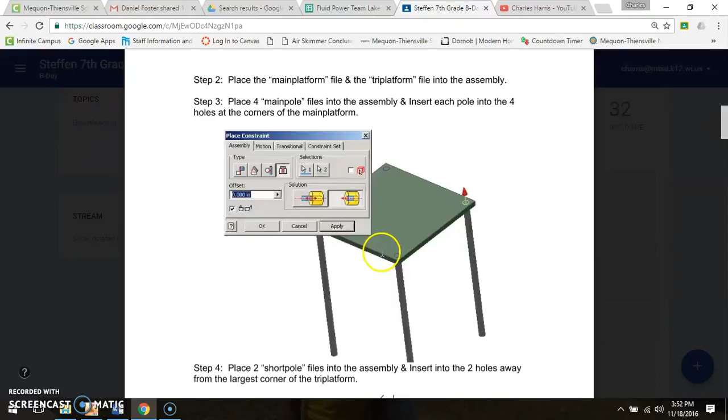Now that we have the monkey bar subassembly done, we're going to get started on the platform subassembly. To make the platform assembly, we need to bring in the main platform and 4 main poles.

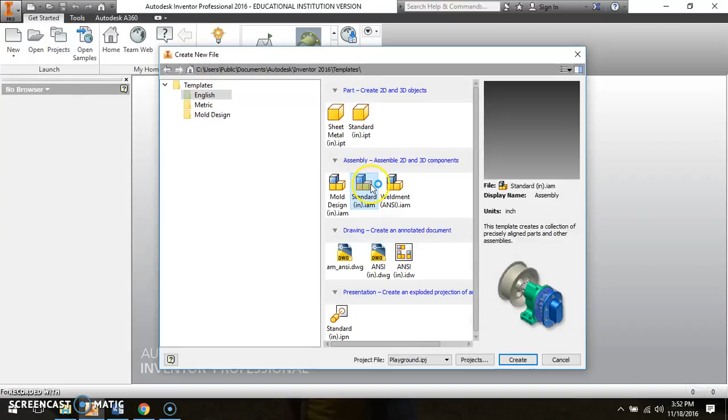So we go back to Inventor, make sure that we are in the right project path, and we are. Go to New, English, Standard.iam, and we're going to place our main platform.

The main platform should have been made off the top view according to the drawing. Right click OK, and we need to ground this and make this our pin piece, because this main platform is going to serve as our anchor piece for the remainder of our assemblies. So right click, grounded. That has now become our pin piece.

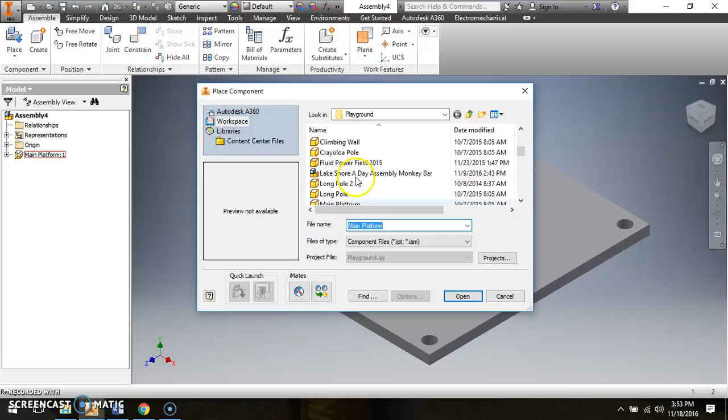Next, we're going to place 4 main poles into our assembly. So go to place, and you will need to find your main poles. So 1, 2, 3, 4, right click, OK.

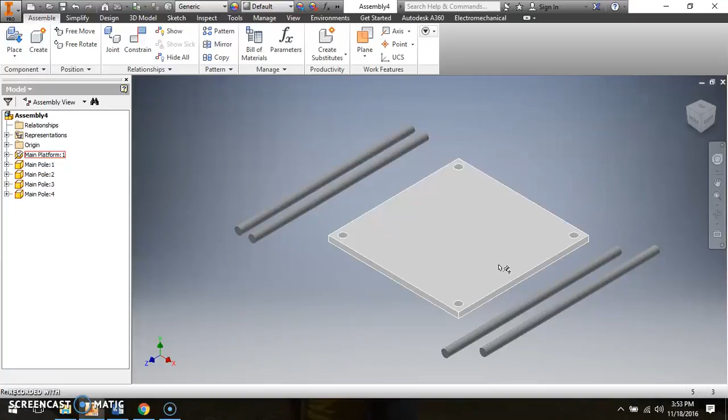To constrain them, I know the directions say to use insert constraint, but we're going to use a mate constraint to put these in and flush the tops of the main poles to the main platform. So constrain, I'm going to pick the center line of the main pole, zoom in, click the center line of the hole, left click, click apply.

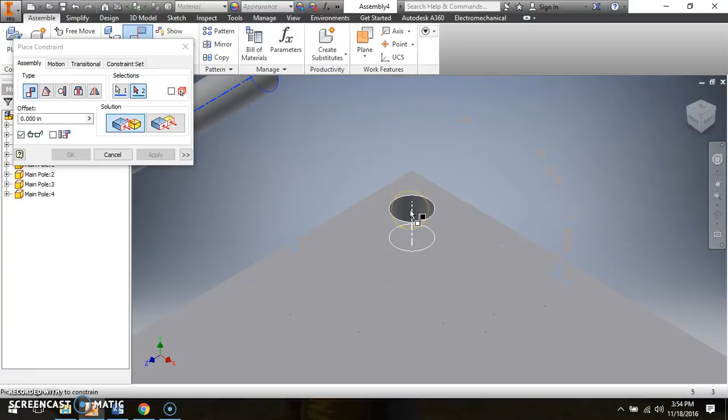I'm going to click the center line of the pole, zoom in, center line of the hole, click apply. Center line of the pole, center line of the hole, click apply. Center line of the pole, center line of the hole, click apply.

Now I've got one more constraint because I've got a couple of degrees of freedom left. The poles slide in and out of the hole. I obviously don't want to do that. What constraint am I going to use in order to put the poles and make them flush with the top? Correct, I'm going to use a flush constraint.

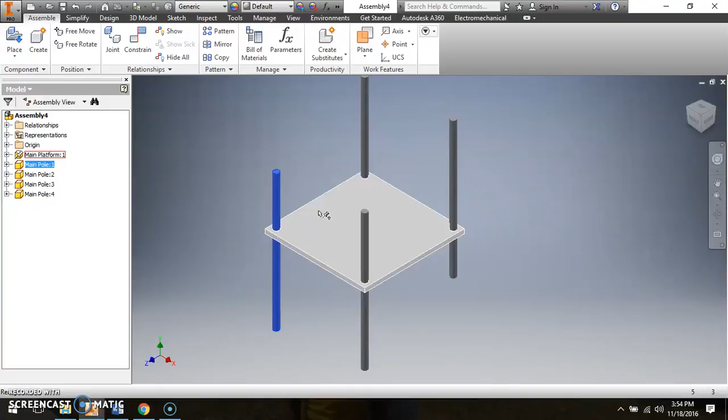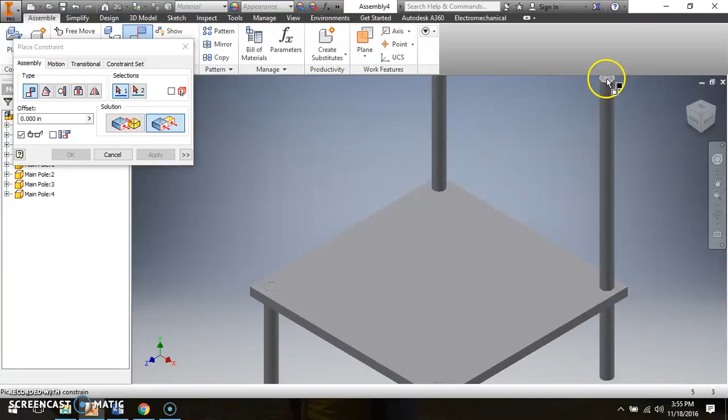So I'm going to go to constrain, I'm going to select the flush option. I'm going to select the top of the main pole with the top of the main platform. Click apply. Select the top of the main pole, top of the platform. Apply. Top of the main pole, top of the platform, apply.

Zoom out a little bit. Select the top of the pole, top of the main platform, select apply. All right, so now we have our main platform done.

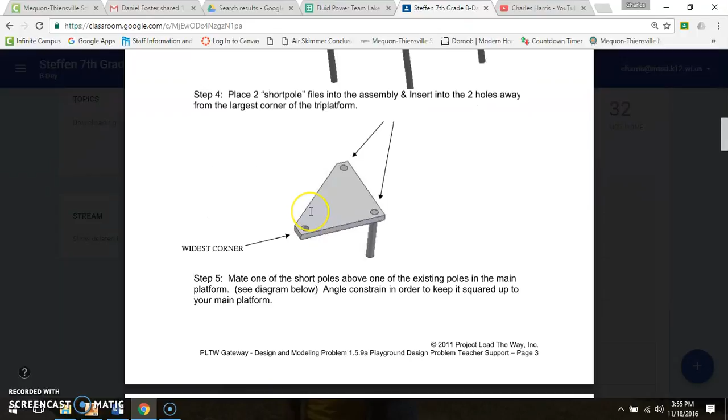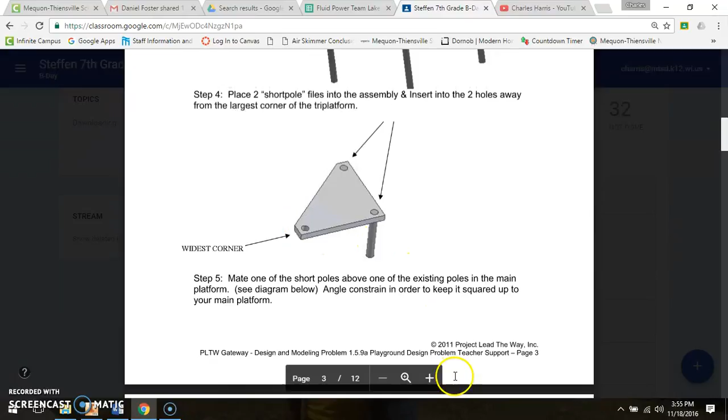Now, according to our directions, we're going to bring in the tri-platform. According to our directions, the widest corner needs to be the front of the tri-platform. Because remember, if we're looking at this and this is our view, this would be the top, this would be the front, this would be the right side.

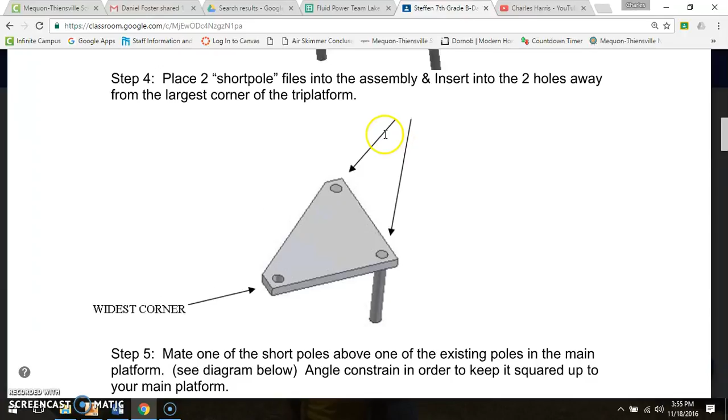And according to our directions, we need to put 2 short poles opposite the right side of our tri-platform. Now this is going to take a little bit of maneuvering on your part.

So the first thing to do is to bring in the tri-platform. So we're going to find the tri-platform. Left click, right click, OK.

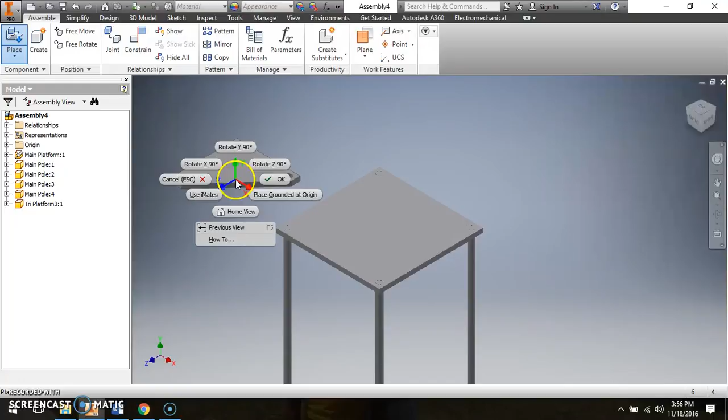Now I need to rotate this tri-platform in order to put this in the right orientation, because the diagonal is facing my left. So I'm going to go to free rotate. I'm going to click on the free rotate, and I'm going to rotate this around to get this in the right orientation so that the diagonal is facing my right.

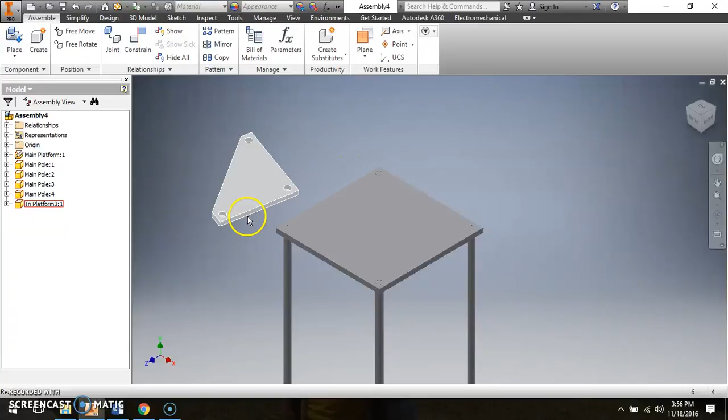I also want to make sure that the widest corner here is facing the front. So just to double check, I'm going to go to Inspect from the Quick Access toolbar, go to Distance. I'm going to pick the 2 corners here, and that is the widest corner. So that makes this corner up here in the upper left-hand corner the 6-inch corner. So this is in the right orientation.

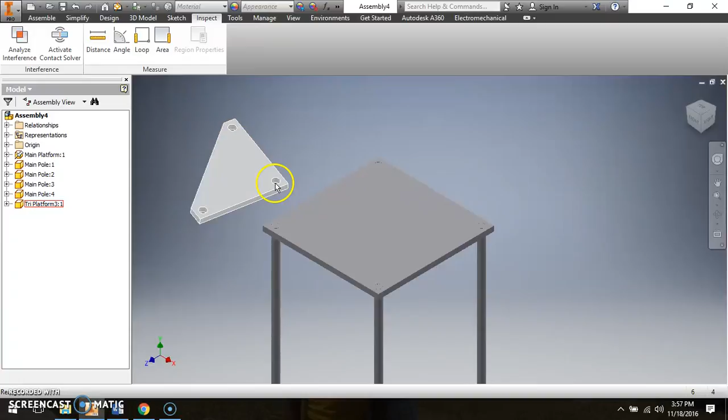I'm now going to place 2 short poles in this hole and in this hole. So I'm going to go to Assemble, I'm going to go to Place, and I'm going to place 2 short poles into the subassembly.

1, 2, right-click, OK. The process to constrain the poles is exactly the same. You're going to mate the central line of the poles and flush the tops with the tri-platform. Constrain.

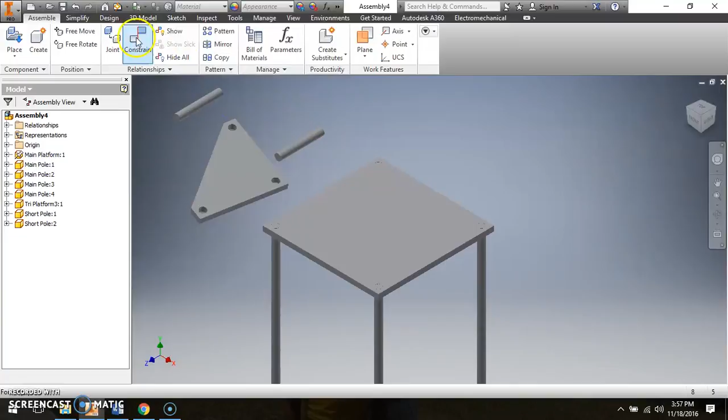I'm going to drag this out of the way. Select the center line, select the center line of the hole, select apply. Select the center line of the pole, the center line of the hole, click apply, and click flush. Flush the top of the pole with the top of the platform, click apply.

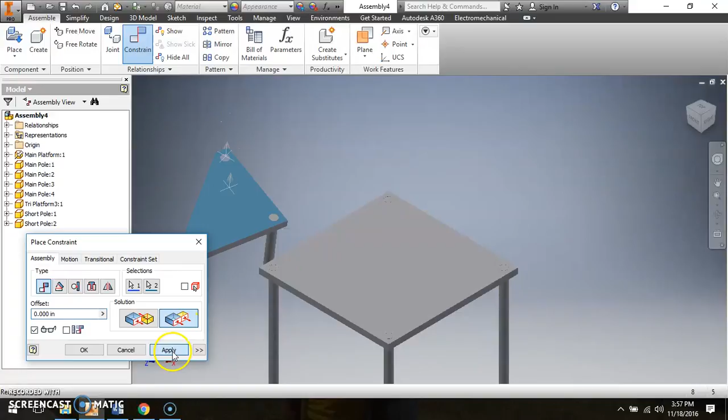All right, so this platform is now assembled. We won't be able to rotate it because as a subassembly, we're missing some relationships, since everything in Inventor is about relationships. And the reason we use constraints in the first place is to show the relationships between objects and how we want them to behave in the real world, how they interact. That's what the constraints show us.

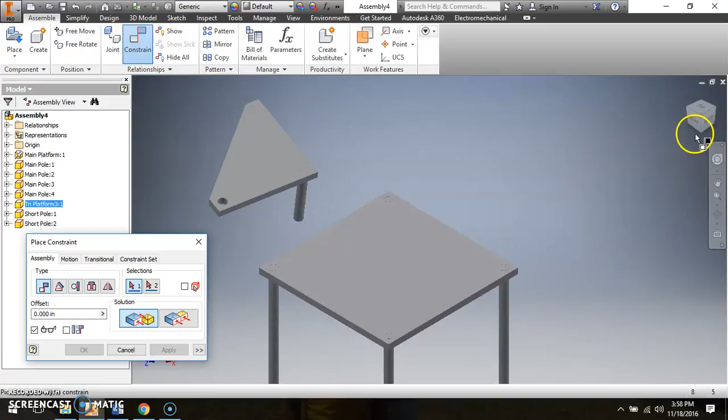So in order to constrain this, I need to pick this pole here. I'm going to go to constrain, and click the bottom of my home. Actually, I'm going to close this. I'm going to select the bottom of my home cube. So I'm looking at the whole assembly, and I want to pick this pole.

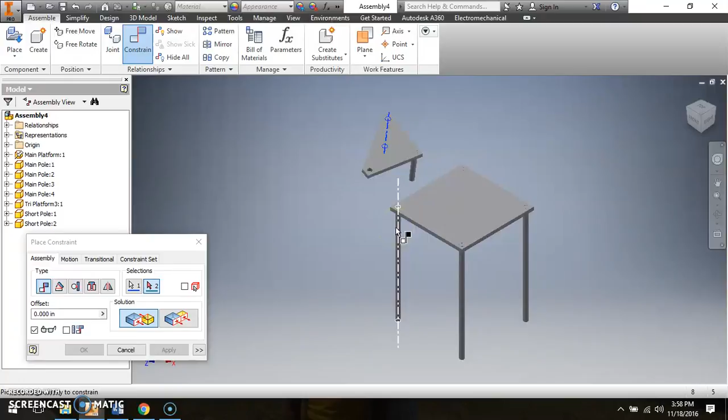I'm going to go to constrain. I want to align the center line of this pole. I'm going to go home, and I want to align that pole with the center line of this main pole here. I'm going to click apply. Close the constraint dialog box.

I've got 2 degrees of freedom left. Now this pole is aligned with the main pole. The short pole is aligned with the main pole.

What I need to do now is select the bottom of this pole and do what to the main platform? What constraint am I going to have to use in order to limit my degrees of freedom? Am I going to use a mate or a flush? Correct, I'm going to use a mate.

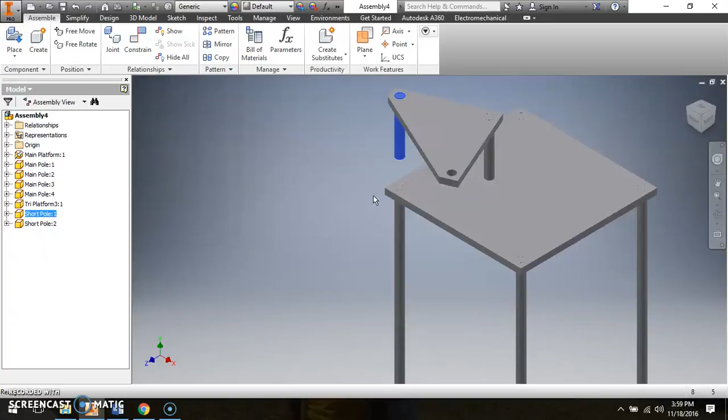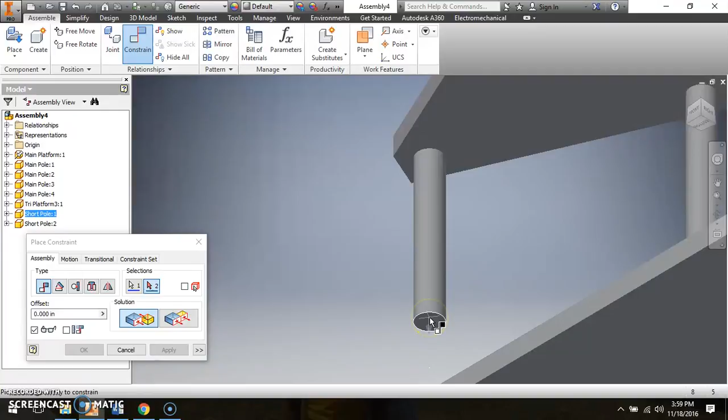So I'm going to go to constrain, go to mate, select the top of the main platform, select the bottom of that pole, and to get to the bottom of the pole, I'm going to select this corner of my view cube, select the bottom of the pole, select apply, close the dialog box, go home. Now I've got 1 more degree of freedom left.

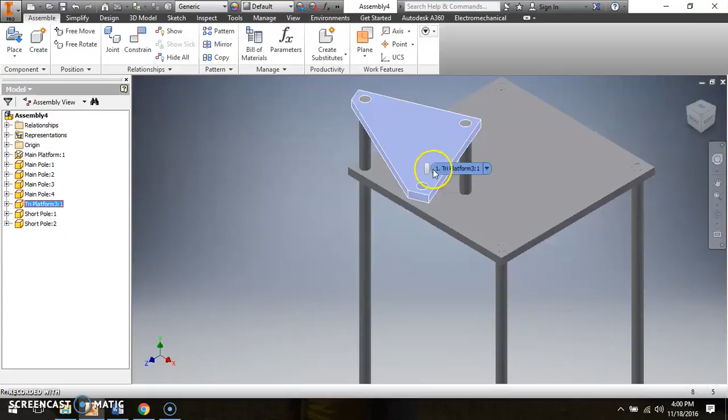Now I've created a hinge. Now I've got this rotation. How do I limit the rotation? This is going to be an unfamiliar constraint for those of you that don't remember this. Now I need to use an angle constraint. I can't use a flush constraint. I'm going to use an angle constraint to limit the motion or restrict the motion.

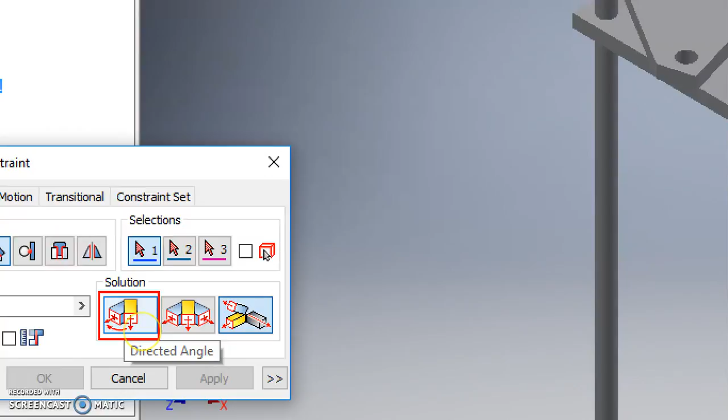So I'm going to go to constrain. I'm going to select the angle constraint, which is right here. Here's the angle constraint. And I'm going to select directed angle, which is right here. Directed angle. I'm going to click the front of the tri-platform. I'll zoom in. I'm going to select the front of the tri-platform, the front of the main platform.

Make sure angle is set at 0 degrees. Click apply. Close the dialog box. This is now set in place.

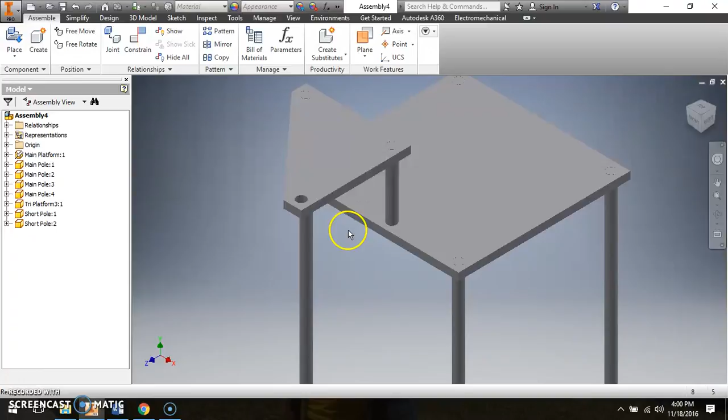There's one more thing that I need to do. I have 1 hole that still needs to be filled, and according to our directions, that needs to have a long pole placed into the assembly. So I'm going to go back to Inventor, go to Place, and find a long pole.

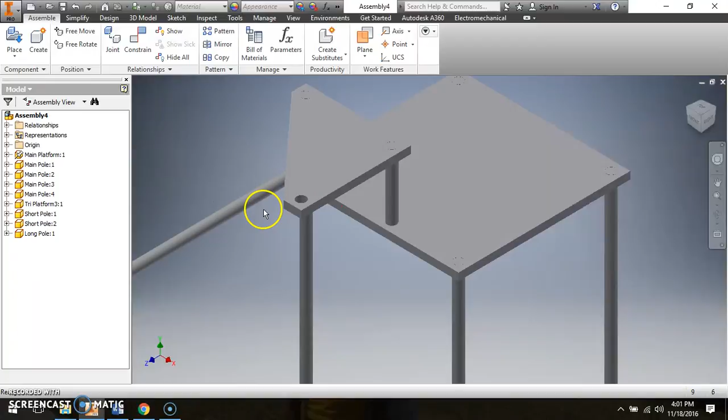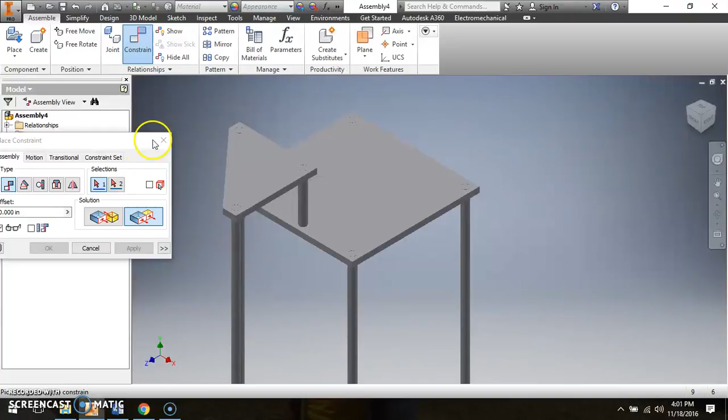And again, the process is the same. You're going to mate the center line of the pole with the center line of the hole. And then what am I going to use to flush the top of the pole with the top of the platform? Exactly, flush. Flush the top of the pole, top of the tri-platform. Click apply. That is now fully constrained.

You are now done with the platform subassembly. And your platform subassembly should look similar to this.